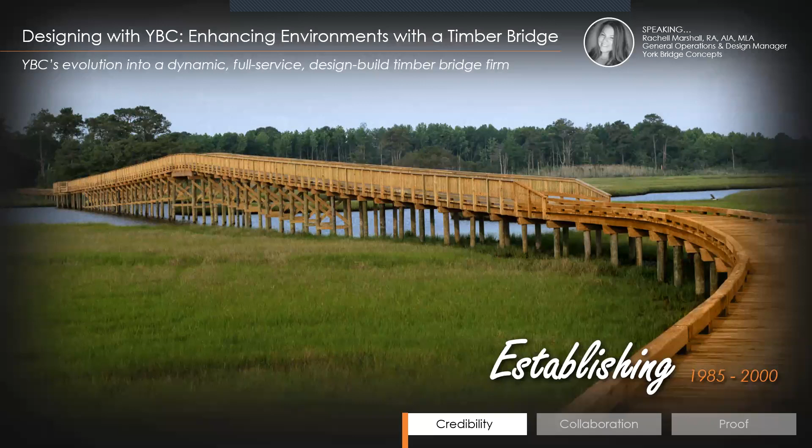To meet expectations of a rapidly intensifying market, we expanded our reach and headquartered ourselves in Tampa. We saturated both national and international markets with thousands of high quality timber bridges. Julie mentioned it earlier—we have over 7,000, possibly 8,000 bridges now in the ground, and we are officially the go-to in timber bridge building.

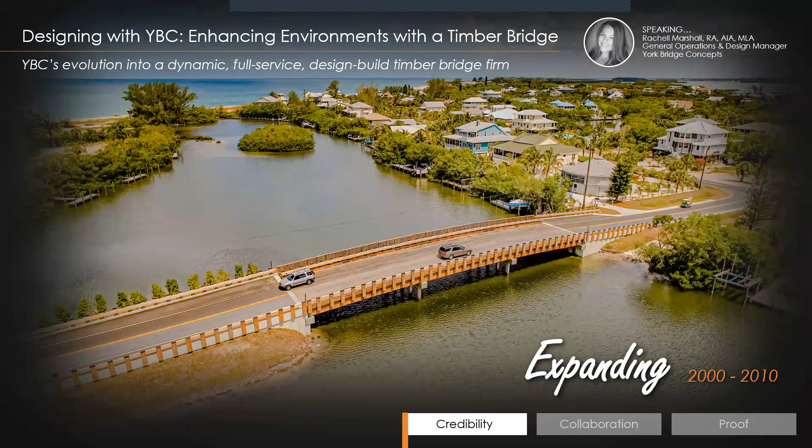Now we're evolving. In the past 10 years, we've focused on refining our reputation for product excellence. In this decade alone, we have introduced 3 cutting-edge focuses for our bridges, including Decero Design.

Yes, I will explain that in a minute. York Bridge Services, and the York Timber Protective Systems.

The Decero design approach is defined as from scratch. It's the mentality that is special to YBC. So think of our designs as from zero. And that is at the core of our pursuit of excellence. We set the bar high for two things: timber bridges and earning the respect, hopefully the repeat business, of professionals

like yourselves. Speaking of design professionals, we've got our results from the poll. So I wanted to take a look at what incentivized you to look at timber in your work. And not to our surprise, budget is definitely coming in high. We definitely wanted you to answer more than one there because we know that budget's a consideration and it's usually

pretty high on the list of demands when it comes to our clients. But I love the fact that general aesthetics is tying with that because timber is beautiful. So what I love even more about this poll is that you guys are pretty well balanced as to what you're looking for. And I think that we're going to cover a lot of these subjects in this design seminar. So without further ado, I'm going to move into the next slide.

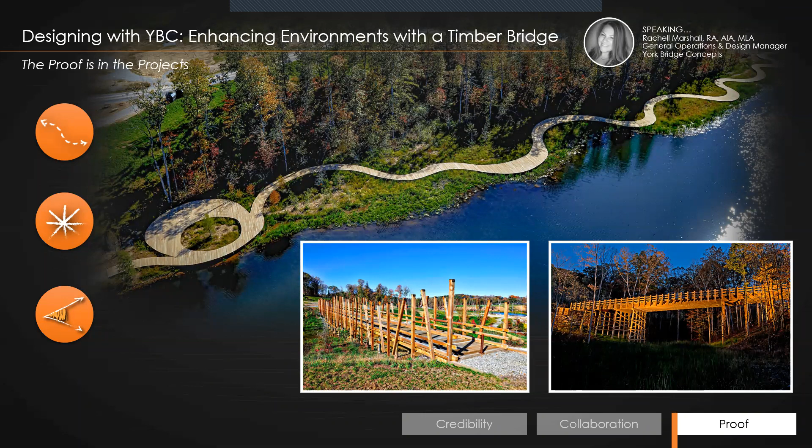Then there's Heritage Shores. We collaborated with the developer in an integrated project delivery capacity here as well, on a golf course community master plan project. The Decero design team focused on paths and vistas surrounding two nodes of activity, including the landmark market and the clubhouse with a waterfront promenade, integrated great retaining wall, vehicular bridge, and golf course bridges, all with a color palette and architectural details to complement the strong stylings of the character of the site.

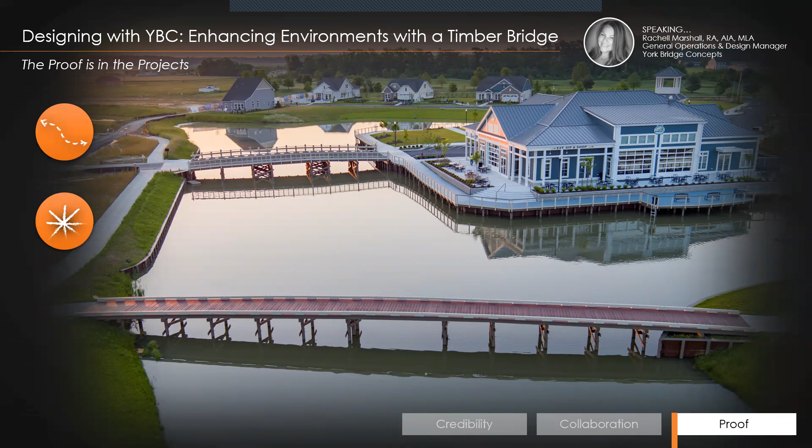Another great project is River Lights. We collaborated with a developer here in another integrated project delivery capacity on this master plan community project that focused on destination-based amenities that embraced the community's location on the Cape Fear riverfront.

All of the placemaking strategies are at play in this expanding master plan, and each of our bridges played their part. So we've installed a meandering boardwalk along the waterfront. We've connected nodes of activities like the restaurant and passive gathering spaces to the pier and the crab dock, as well as a pedestrian bridge on one of the multi-use trails over a channel.

As the community grows, so do the York amenities. We look forward to continuing their story with more bridges.

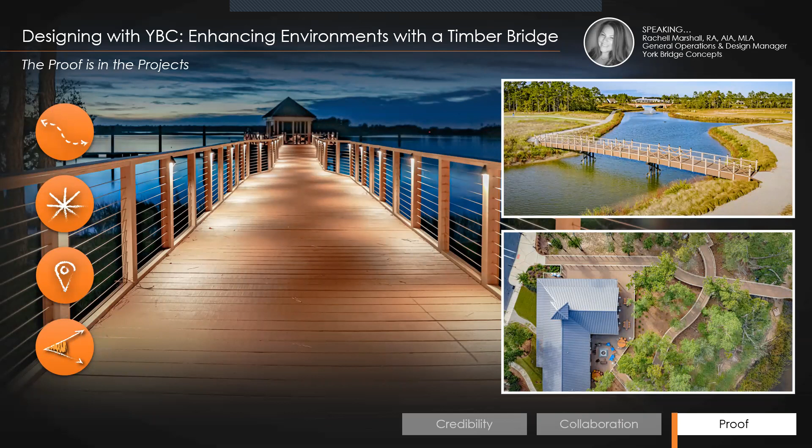Speaking of multi-phase projects, the Ringling College of Art and Design - we collaborated with both the landscape architect and the general contractor in kind of a hybrid design, build, and IPD capacity in a phased campus project that mainly focused on path and node. Boardwalks curve through the campus landscape, connecting residence halls with smooth, well-lit open walking paths, seating areas, and 2 multi-use benches that required every ounce of collaboration between our design team and our carpenters be engaged.

That's the bottom right picture, one of those 2 massive benches for the students.

So how did we get to those great builds? Let's review a couple of our most recent builds: the Edison Chastain Vehicular Bridge in Georgia and Memorial Park's pedestrian bridges and amenities in Texas. I'll also summarize a few resources that we have that may not have been necessary for those projects, but could be very relevant to your next project. We'll utilize that familiar design process diagram at the bottom to highlight our project timeline.

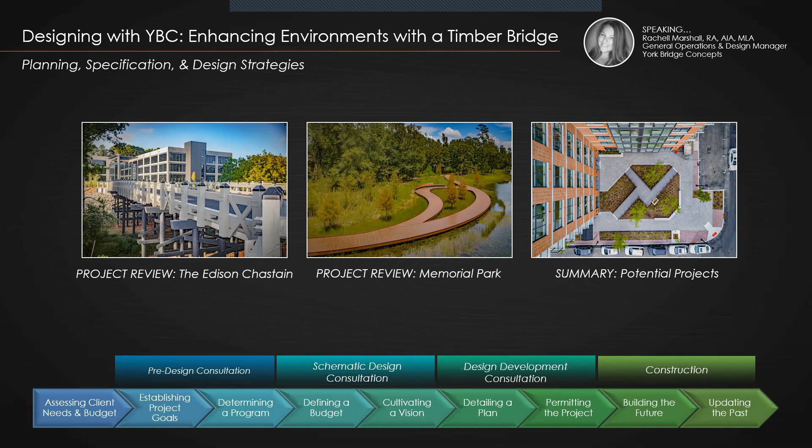The Edison Chastain project started as a simple meeting between our esteemed bridge consultant, Titus Edwards, and a GC to introduce YBC. We were asked to ballpark an alternative to a potential concrete bridge for a new office building. The use was to serve as a connection between the parking lot and main entry for vehicular and pedestrian access over a protected waterway dividing the site.

So our pre-design consultation revealed that we were looking at a double-lane vehicular bridge with a standard HS20 capacity and an attached pedestrian section designed either as a free span or a multiple span configuration. A multiple span approach is what you see illustrated here in the generic profile on the right, representing similar conditions to the site. We can provide various generic items in the pre-design phase that assist you in illustrating a bridge approach to the client or your team early on.

In this particular case, we and the contractor liked the idea of the constructability and feasibility of using a multiple span here instead of a free span. Everyone, including the architect, liked our ballpark and the product.

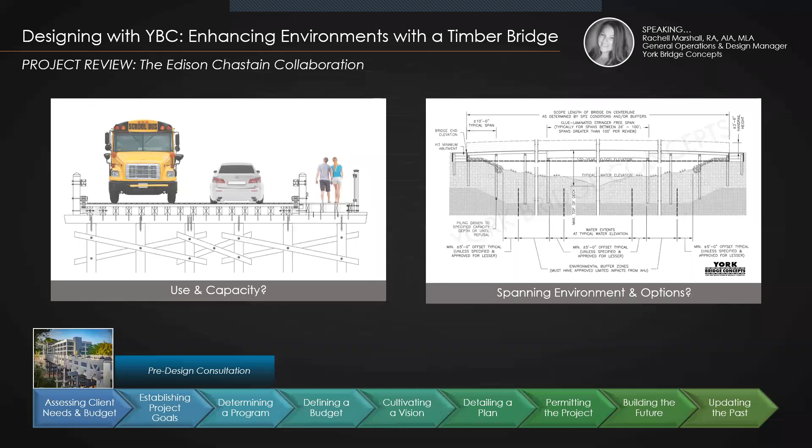They even requested our assistance in, we'll say, pitching the concept to the necessary entities to move into the next phase. We provided multiple materials like our portfolio, a custom company profile, and of course, some specific project references via our web galleries. Now, the portfolio and gallery are fairly self-explanatory, but what is a company profile?

This is a package that allows us, YBC, to introduce ourselves without being in the room. It's great for committees or boards as a takeaway about the bridge. For this project, we customized the package to provide information on the design, the construction, and the engineering concepts we utilized to provide this 75-year design life bridge, which meets the industry standard set forth by AASHTO for bridges.

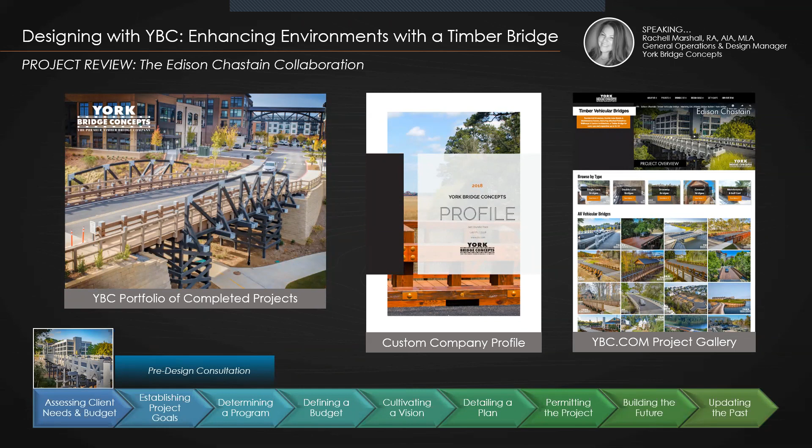Now, the company profile was enhanced with some schematic design work per our review of the site-specific information. We analyzed the crossing to determine the breakdown of the spanning configuration for the multiple span. So what exactly does that mean?

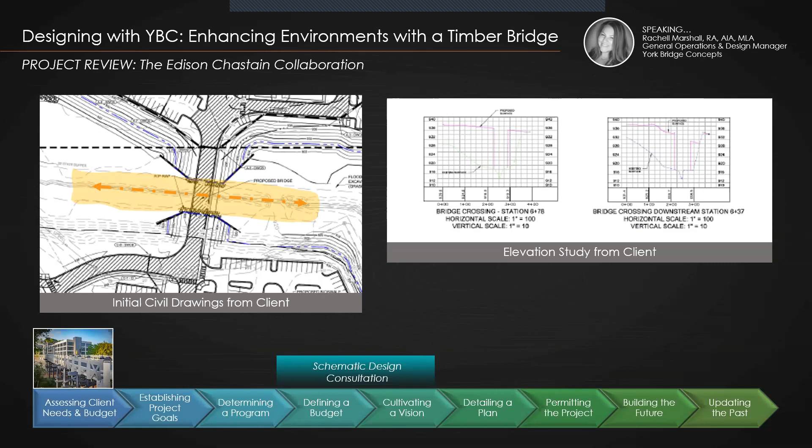So if you see on the left here, I've illustrated the center line. This is the waterway, and then there's a buffer zone. In this particular case, the piling were deemed acceptable within the buffer zone, which is great news. So let's look at it in elevation.

So our layout looked a little something like this. Here's that center line, and here's the buffer zone. You can see that our span is centered on the waterway center line, with piling still inside the buffer.

We were proposing a desirable 40-foot center free span with approaches. I say desirable because 40 feet is a nice length that gives lots of room for the waterway, but it also doesn't start to drive cost. The longer a free span is, the higher the cost is going to go.

So we were asked to provide a vision of what this bridge might look like. Enter the vision board, featuring our exclusive protective systems. All of this was actually incorporated into the custom company profile and was successfully passed by different team members, quickly moving from pre-design to a cost submittal.

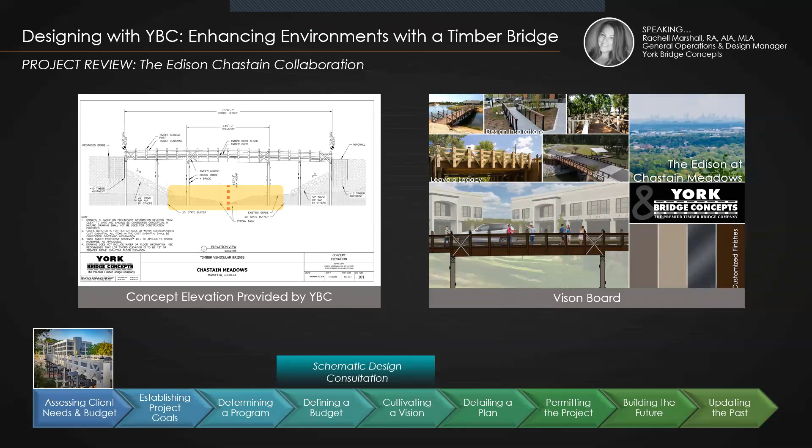Now, our cost submittals are detailed with information about all of the systems and services provided with our product, as well as the specific details of the scope and what is needed to perform the work.

The architectural team was so inspired that they provided a new, beautiful rendering of the project, now featuring that York Bridge as the celebrated entry.

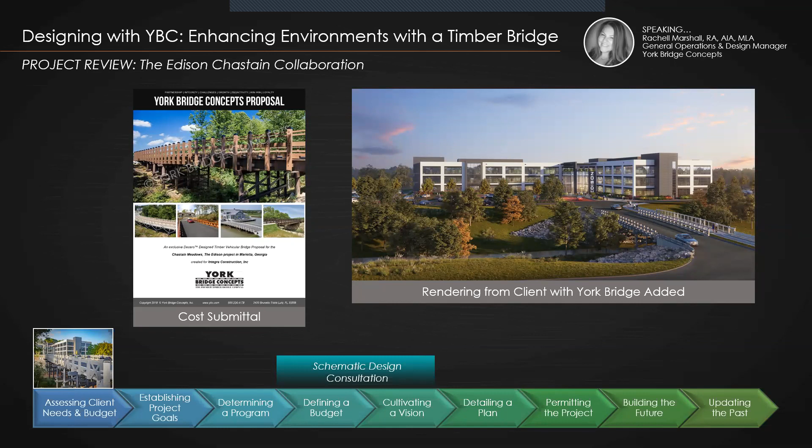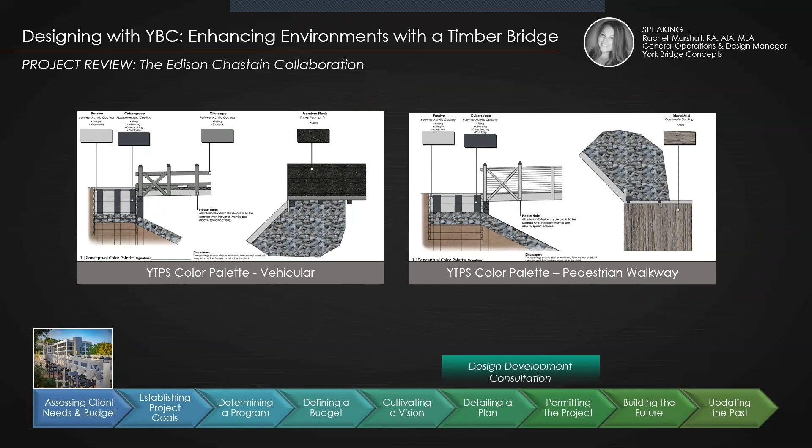In design development, we refine items like the color palette, as well as produce a detailed set of shop drawings that are used in the final engineering of the bridge and for the on-site construction.

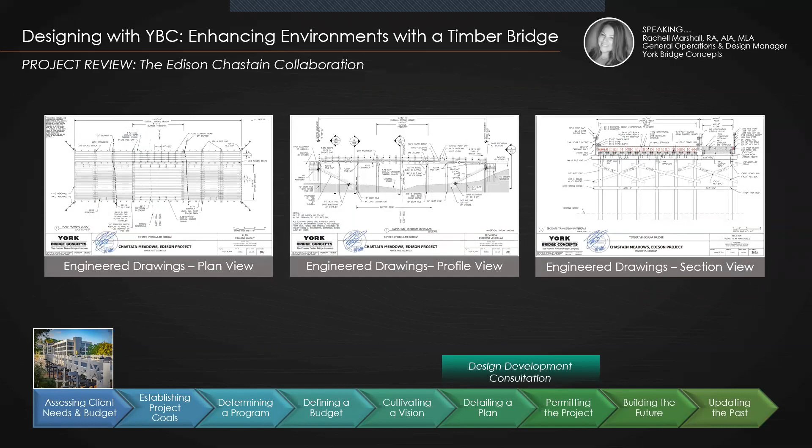So in seeing this process in detail, I have a question for you that we're going to put up in a poll, and it's already there on the screen. What resources are most helpful to you in your design phases? Is it pictures, generic profiles, generic sections, detailed scope and cost submittals, or previous project cut sheets?

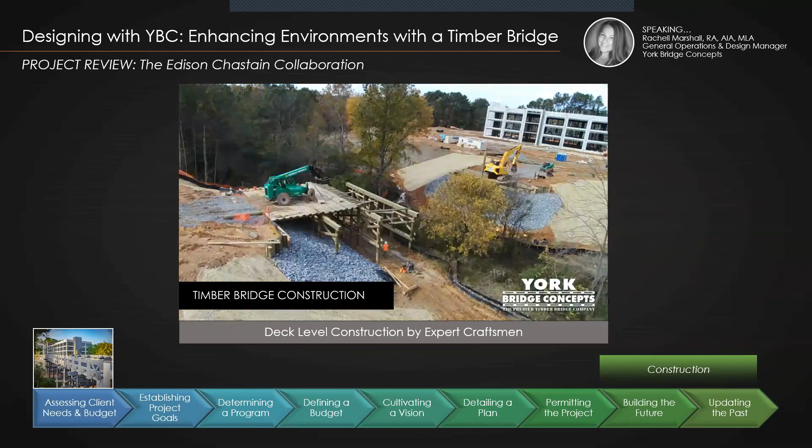While you're answering that, I'm going to highlight this amazing time-lapse video we have of the construction at Edison. Can you believe a 3-man team built a bridge in under 3 minutes? Yeah, no, neither do I. But they are very fast out there on the site, and we did complete this bridge in under 3 months.

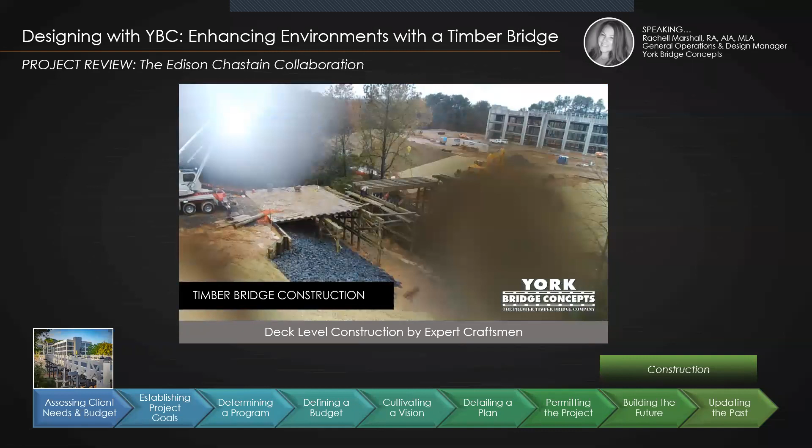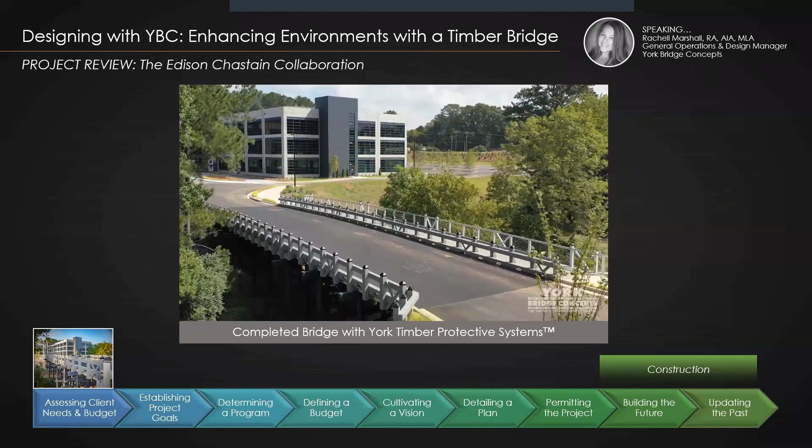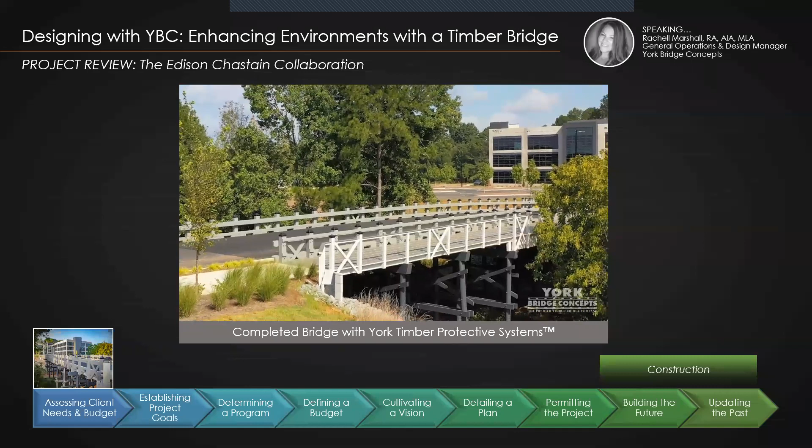Now, after construction, we returned to perform our York Bridge services, complete with coatings. These protective systems help with the longevity of the bridge and also help reduce maintenance. Take a look at this wow factor of the finished product. Every detail is accounted for, creating a seamless integration to the environment, site plan, and vision.

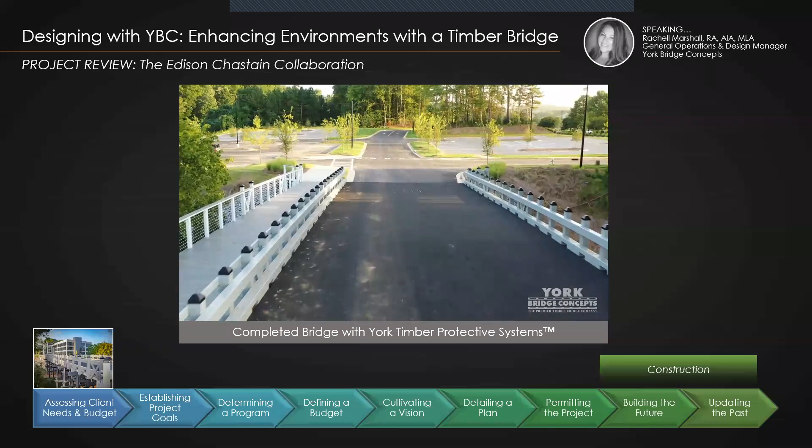So I know that Julie's going to leave that poll open just a little bit longer, and then I'm going to circle back to it a little bit later. And instead, we're going to move a little bit further into our Memorial Park project.

So again, this is a wonderful design that we were asked to price for a selected general contractor. We were familiar with the landscape architect's work because we partnered with them before. You know that Boy Scouts of Summit Bechtel Reserve project I mentioned before? It's them again. They provided a world-class design, complete with some challenging amenity boardwalks and spaces.

So our pre-design consultations were after their design phase. So you can see that in this project, we were acting as a design builder, but we still needed to assess things that made up their scope via basic markup of a bid package.

And I'll show you some enlargements of what's on the right there. This is what I mean by markups. It's just making sure that we have everything considered - length, width, height - so that we can give you appropriate information back.

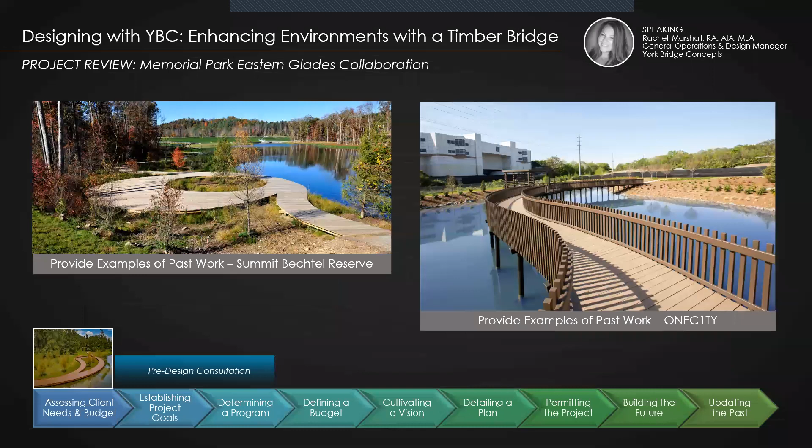We provided examples of our work to illustrate comparable work with complex curving, and then they added some scope. They added some integrated benches and what we call the matchstick boardwalks in the dense native uplands of the park, to which we refined our scope and our cost.

And always a guarantee, we're going to give you a cost submittal because it details our price and process. We try to get this to you sooner than later to illustrate everything that goes into our work.

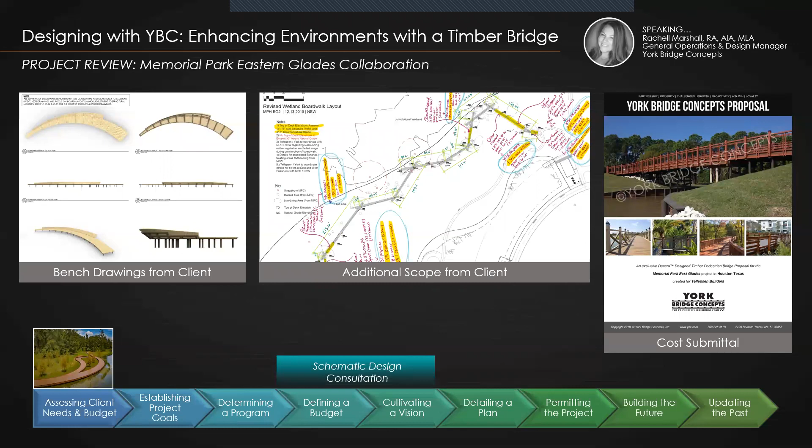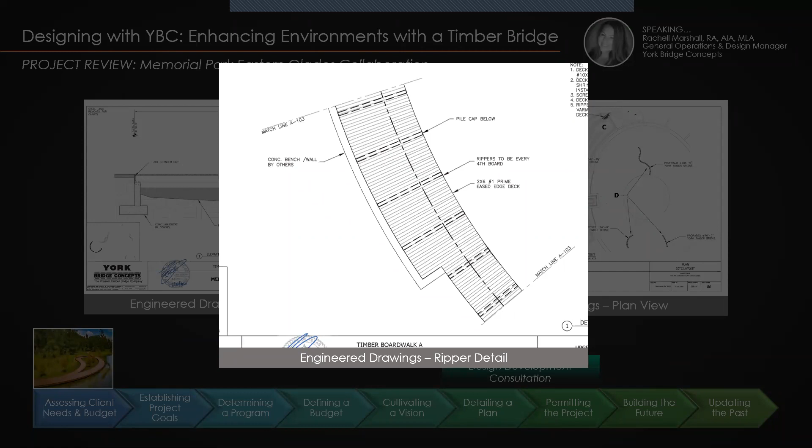We actually detail the ripper patterns and the screw layouts here because our bridges are in the good hands of our expert craftsmen, but our designers do their best to think of everything so that our field crew doesn't need to improvise.

They can just stay focused on remaining on task and on schedule. I mean, building these bridges is an art form.

As you can see in this sequence of construction stages, the boardwalks evolve from paper to a series of piling, deck boards laid out in an organized manner. Okay, it looks a little chaotic to the average Joe, but they know what they're doing.

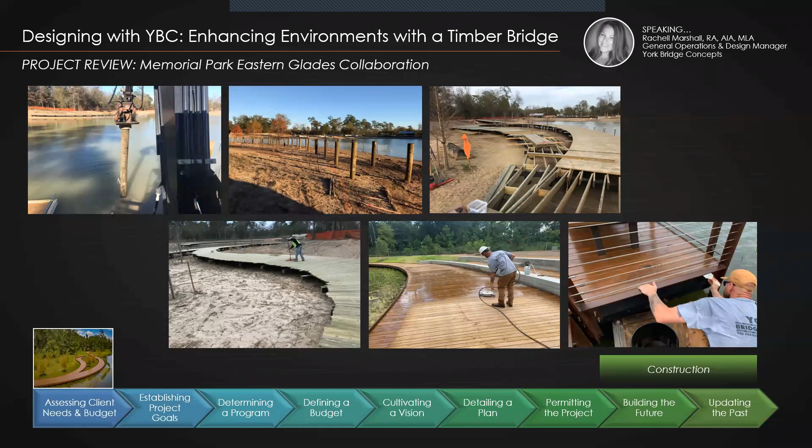And then the edges are carefully cut to smooth the curves that are later dressed with protective systems - in this case, a translucent oil-based series of coatings. Everything is meticulously thought out to provide the utmost quality that resulted in this beautiful environment.

We love that our bridges offer an experience on this site with swift infinity edge style edges, comfortable gathering spaces, and even some more rustic woodsy exploration zones.

So to recap, in the pre-design phase, we have a generic company profile that in some cases can be customized as relevant to the project demands.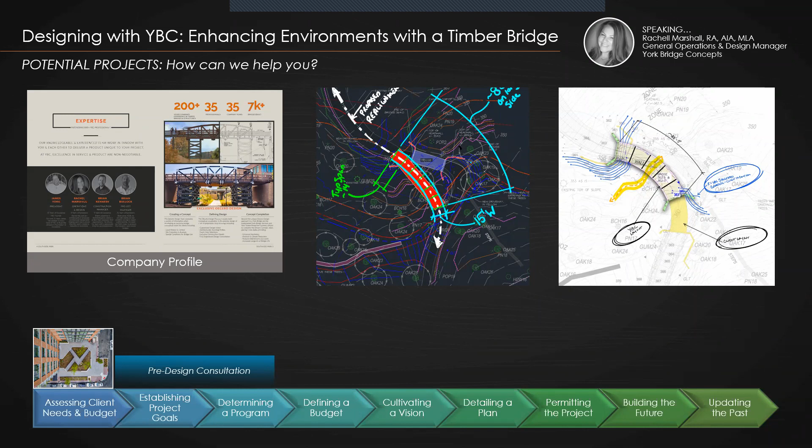Occasionally, we have the ability to provide vision boards or color palettes to help sell the idea of timber to city councils or HOAs or similar.

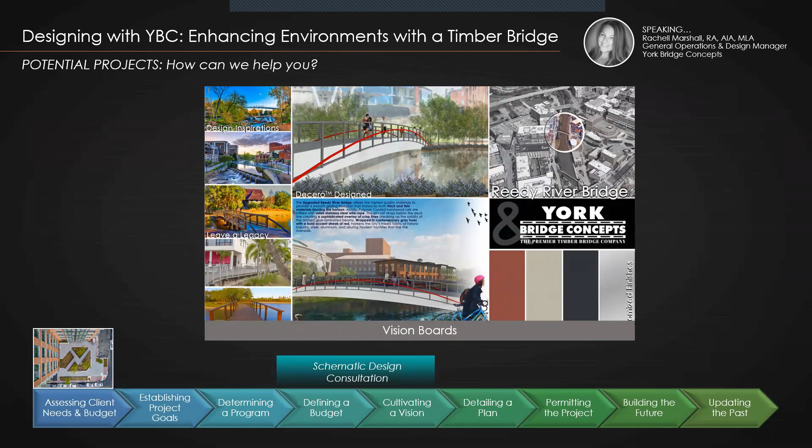We more commonly will develop profiles capturing conceptual layouts. Our cost submittals are very informative and include imagery, process info, and design parameters.

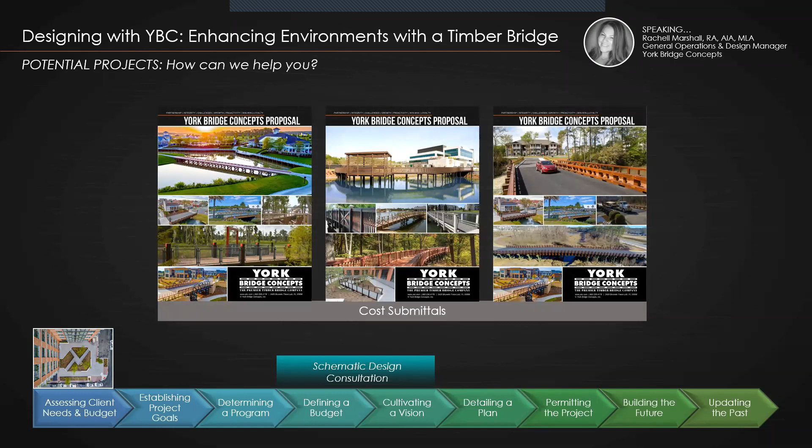After contract, our clients can expect a wonderful and thorough set of shop drawings for approval before they're engineered. Our engineering consultation and remote permitting assistance are always included in the design process.

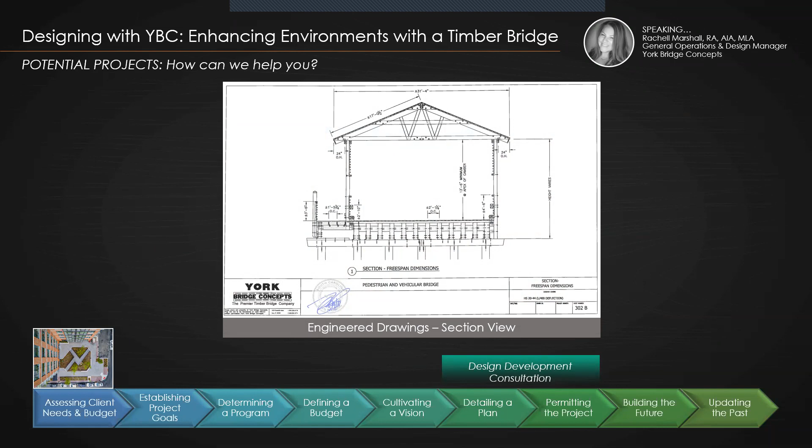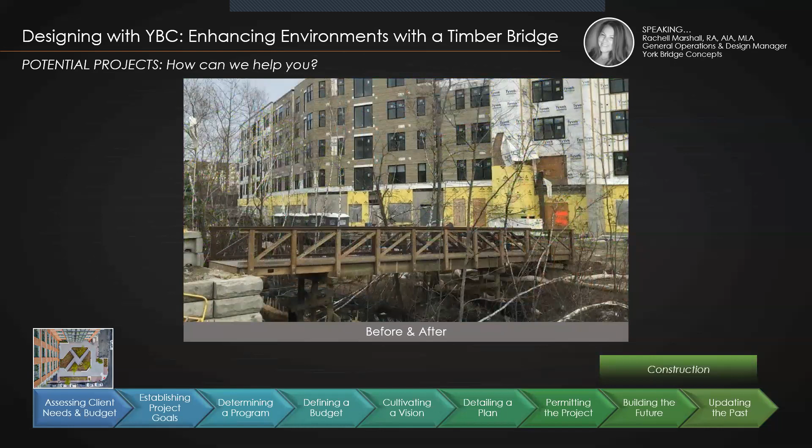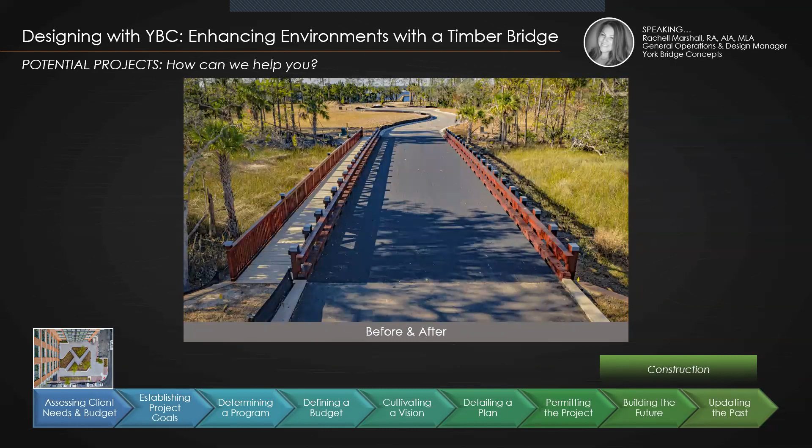Finally, the install. Here are some great before and after shots of other projects in the heart of residential, recreational, commercial, and even downtown urban environments. This is where you can find some of YBC's greatest legacy bridges.

Now, while this is playing out, let's pull up those second poll results. All right, there they are. So everybody has a strong preference for...

Pictures. Well, good news guys, we've got tons of pictures. We have tons of pictures on our website, and we're actually going to bring those in. Let me close this down for a second so I can move to the next slide. But pictures, followed by generic sections, then our cost submittals, previous project cut sheets, and generic profiles.

All right guys, thank you for that feedback. And I say thank you because we're unveiling... there we go. We have a York Bridge Design Center that we're just kicking off the ground.

And this has things like CAD resources, generic span drawings, some section views, those project cut sheets, and some loading diagrams, because we know as bridge builders, loading diagrams are not easy to come by.

So we invite you to come design with us and ask us for those pictures and work with us. I hope that all of these illustrations have given you an idea of how we can be involved with your projects through providing these resources.

And if it's not on the Design Center, don't hesitate to call us. Just ask us. So thank you for joining me today, and I'll hand it back over to Julie.